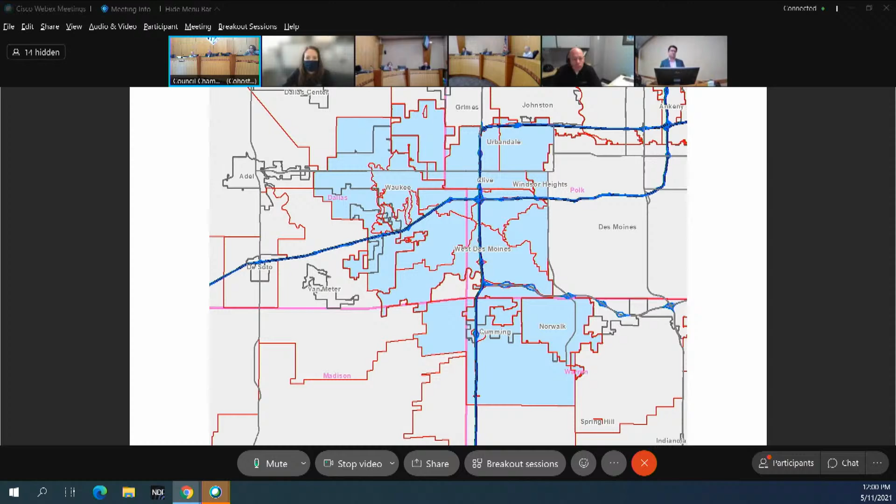And this would be, with Windsor Heights' addition, the coverage area. Growth in the future, is there options and opportunities? Sure, but Wescom isn't looking to grow just to grow. We want to make sure it makes sense for the system and the operations. And also, we've got now potentially 6 member communities that are all growing, or for the most part are growing themselves. So just keeping up with that population growth is an important thing for us.

So moving forward, some key projects: we're doing some rehosting of the network. Those are some things that we wanted to change from a technology perspective, as the chief alluded to. Another task of one of the other strategic planning committees, this was the governance committee that took on this project of updating the 28E. We have other subcommittees that are working on various elements of the strategic plan.

One of those is setting that service expectation. The Chief had talked about the accreditations to complement both your police department, Clive's police department, West Des Moines, that are all CALEA accredited as well, and other communities seeking similar paths. And then ultimately recommending the approval of Windsor Heights joining Wescom. So that is going for formal consideration before them on Monday. They are first in the queue of the formal vote.

And just to give you a little bit of the mechanics: all of the member communities are being asked to vote on and approve the updated 28E agreement. There's an additional action that both Windsor Heights and West Des Moines, as the operating agency of Wescom, will be doing, and that's a memorandum of understanding that lays out the terms by which Windsor Heights joins Wescom. A couple of the aspects to it: they're being asked to pay 2 years up front, non-refundable, for their operating costs. They've got costs they need to incur for their technology to get up to the Wescom standard, some reprogramming of radios, things like that they need to do.

So just a very brief agenda, and I know we're probably feeling a little squeezed for time, so I'll try to accelerate my portion. We're going to talk a little bit about the study scope, the technical approach, which is my element of the project, and then I'll transfer it over to Nicole to talk about the capital improvement planning process.

So where did this all begin? It was introduced pretty well before we got on stage here. The city issued a request for proposals back in July of 2020, right smack in the middle of probably the worst part of the pandemic. We got under contract August 11th, which means today is 9 months after our starting point.

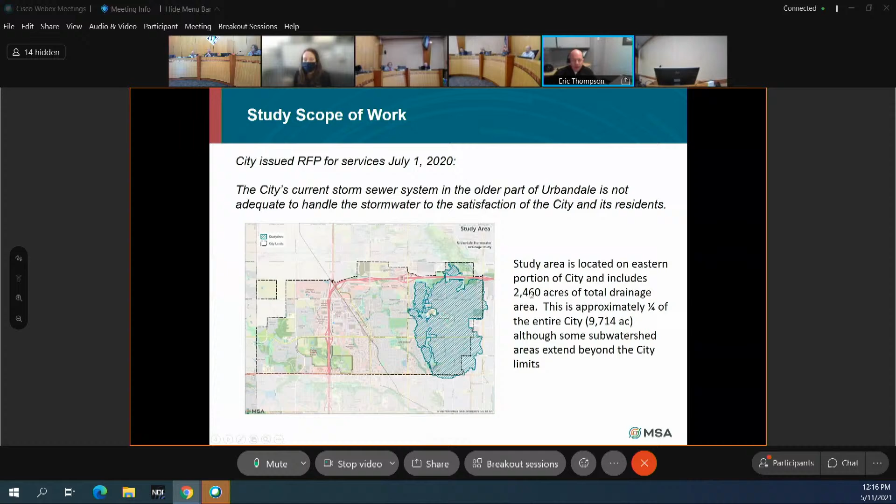You're going to see a blow up of this map in the next several slides, and I'll go over it a little to help you get your bearings. This study looked at 6 major watersheds, identified by the creeks they drain to. We more or less looked at what it would take to provide a design service level equivalent to the Iowa SUDAS manual, the Statewide Urban Design Specifications Manual. It establishes the minimum criteria for really all civil engineering projects throughout the state, and one of those chapters in particular is related to stormwater drainage and stormwater management. Pretty much everything we did followed the SUDAS design standards.

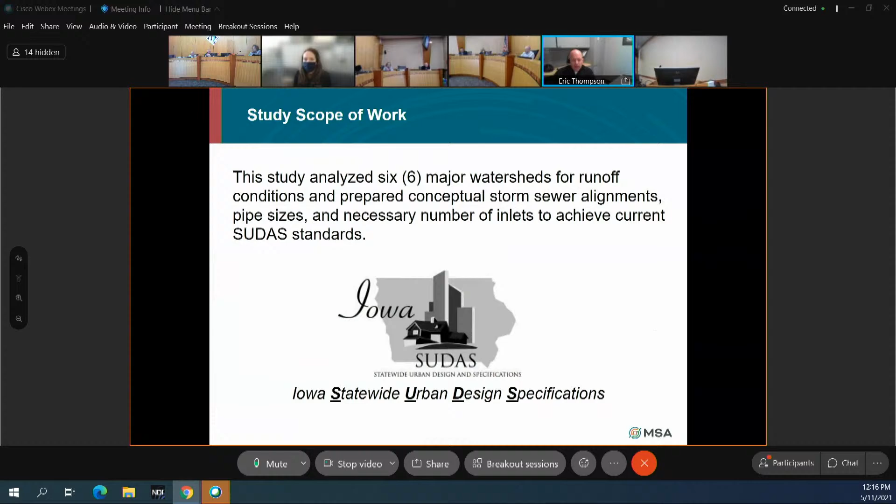So what are those standards? There's a whole host of them, but the long and short of it is we really focused on 2 things: the design service level. SUDAS says at a minimum we should be looking at the 5-year storm for a storm sewer design, but the engineer, if there are sensitive issues at hand, could up that to the 10-year storm. In discussing this with city staff, it was decided that the 10-year service level would be more desirable.

In today's way of thinking, we really don't like to talk about a 10-year storm or 5-year storm anymore, because there's an old school understanding that, oh, we had a 10-year storm last year, so we're good for 9 more years, right? Well, the 10-year storm is really best equated in terms of percent risk. We have a 10% chance any given year of having a 10-year storm, and if it was a 5-year storm, we'd have a 20% chance risk. So going from the 5-year to the 10-year service level provides an extra 2 times safety factor.

To put that in yet another way, the 5-year event is about 3.8 inches over the course of 24 hours, and the way we do these designs, most of that rain is compressed into the middle 2 hours of that 24-hour event. So 3.8 inches in 24 hours is the 5-year storm, and the 10-year storm is about 4.5 inches. These are fairly large storms considering how quickly they're falling across that duration. So criteria number 1 is, what is the drainage level of service? Again, we're looking at the 10-year service level here.

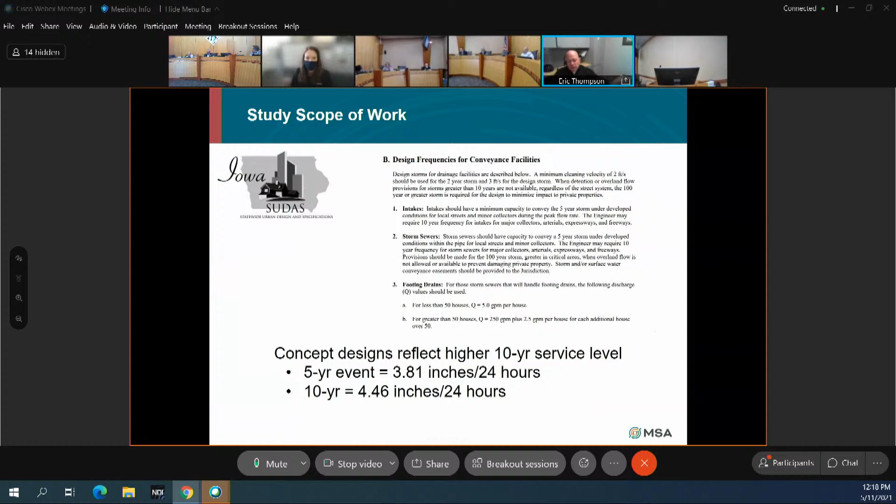Condition number 2 is to provide footing drain service to all of the existing homes in these neighborhoods, to make sure their foundation drains and sump pumps can connect to the drainage system. These are the criteria we're using, which are actually a little higher than what the SUDAS standard requires, which is generally 5 gallons per minute per house. We're up to about 12 gallons per minute per house on average in this part of the study.

But in reality, when you talk about footing drains and sump pumps, it's just a teeny tiny drop in the bucket relative to the flows that come off the land when we get one of these big rainstorms. So this is really a minor design detail, but nonetheless it was a significant consideration for how all the pipes were laid out, to make sure we had connection points for all the existing houses.

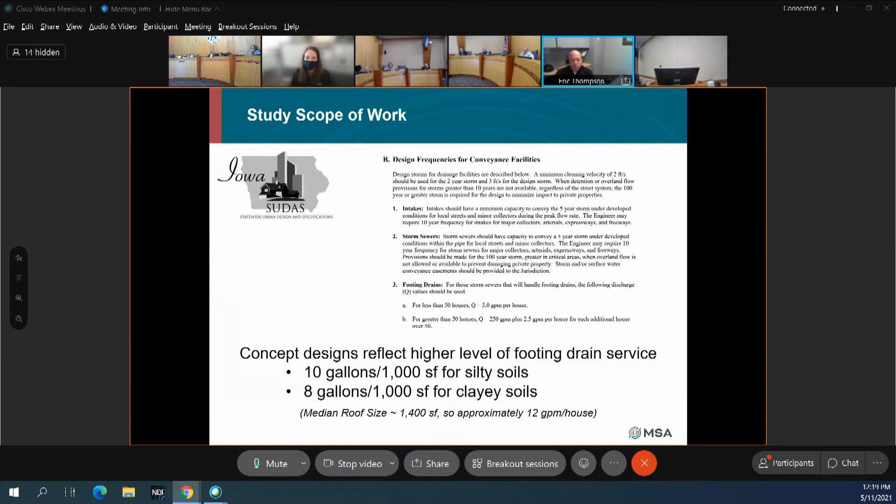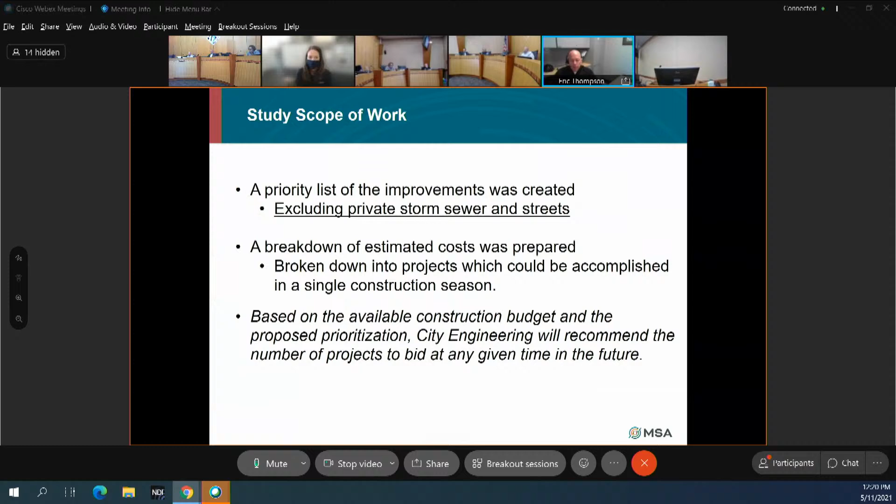The scope of work identified in the request for proposal was to provide a priority list of improvements on the public portion of the drainage system. That excludes private storm sewers and private streets. We wanted a breakdown of all those costs so they could be consolidated into an entire program budget, but also broken out into what could be done during a single construction season, or accommodated within an annual budget the city may have available. Based on the construction budget and project prioritization, city engineering will recommend what projects to do in 2022, 2023, and so on, as the capital program lays itself out into the future.

That's a brief recap of the study scope and what we're trying to get done here. I'm going to dive into the technical approach, and I've got two main points to convey to the council today. One is the vast amount of data we crunched to evaluate this entire system. Secondly, the final finding of how close the existing system is to what we'd like it to be in terms of an ideal system. That'll all wrap up at the end.

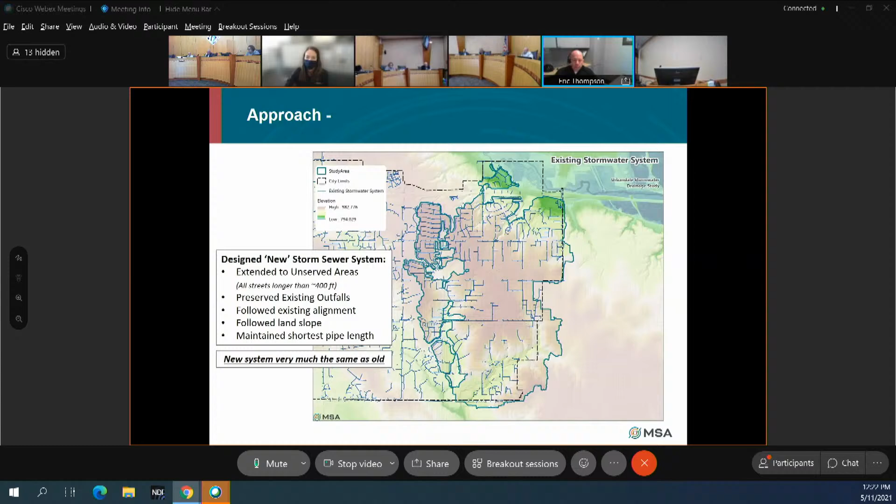Here are the study areas we looked at, organized more or less by the major creeks: Rockland Creek, Karen Acres Creek, Millside Creek, Timberview Creek, Northview Creek, and the Lakeview Pond area. I warned you I was going to give you your bearings, and I got a little ahead of myself.

If you can see my mouse jiggling back and forth, this is Interstate 35, and here is Merle Hay. On the south side we've got Hickman, and over here, a little tough to see, is 86th. Running about a third of the way up from the bottom, this is Douglas, and about a third of the way from the top, that's Meredith.

You're going to see this map in some shape or form many different times, and if you can mentally picture where these streets are, it should help you get your bearings when we start talking about anything specific. The total study area is about 2,400 acres - 2,460 to be precise - which represents just about a quarter of the entire city.

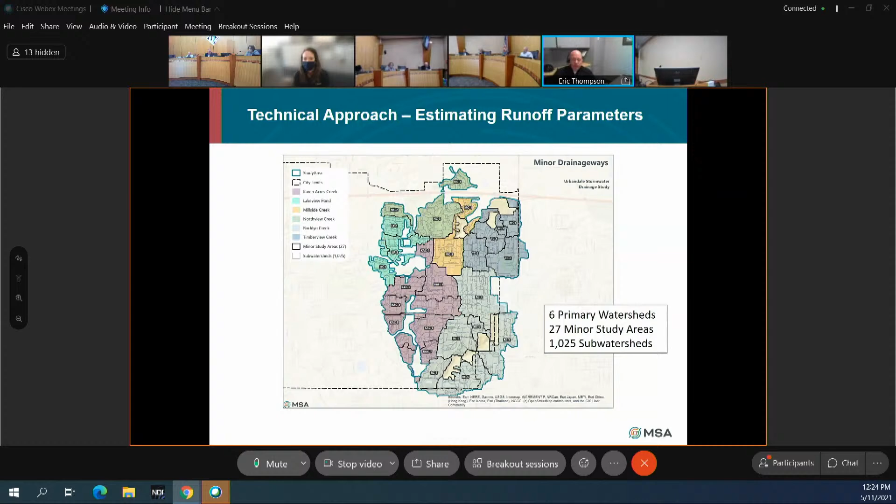So as we drilled down, we started with these large watersheds, and we broke them into 27 minor study areas, and then each one of those was broken out into subwatersheds, basically accommodating an intersection by intersection basis. When those intersections ended up being substantially more than 400 feet apart, we subdivided them again. This study ended up being over 1,000 individual assessments of how much runoff we're getting, how it's moving through the city, how we're collecting it, and conveying it through pipes. It became more and more detailed as we drilled down further into our design assessment.

How do we get to those flow numbers? Well, this is an important slide. This is an image of all the impervious area that's been constructed in this part of the city. We looked at recent aerial photographs, checked against construction plans, and actually measured and digitized all that impervious area, because impervious area is the primarily important driver in determining flow rates. There's over 1,000 acres of impervious area in this nearly 2,500 acre subwatershed study, about 42% pavement in some way, shape, or form, whether it's a driveway, a sidewalk, or a roof. It's a heavily, densely developed area, so there's a lot of runoff that comes from the lands in the study area.

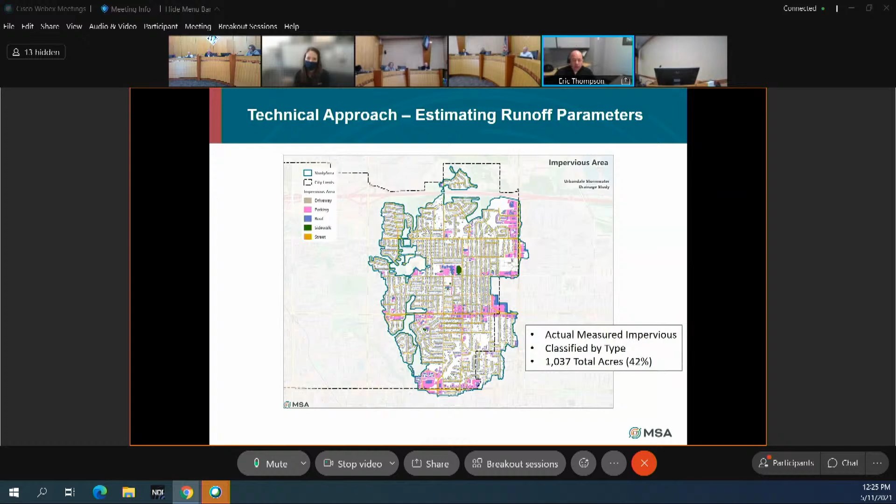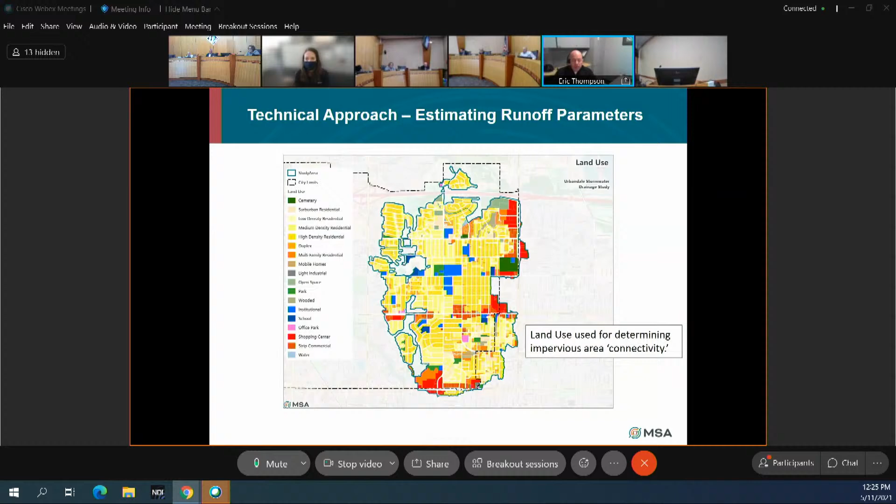This is the land use, which allows us to figure out what we call the connectivity of the impervious area. Does it drain over grass, or does it go to the street and then right into the storm sewer? Those are important considerations for how much water actually makes it to a pipe, as opposed to how much is coming off of the land.

And then finally, for areas that aren't impervious or paved, we need to know the constituency of the soil. Anyone who's worked in their garden probably understands it's a pretty heavy soil area, pretty silty. In some areas in the north and west where you can see those purple blobs, it actually gets kind of clayey. So even when the area is not paved, the soils do tend to shed more water than you might expect in an area that has sandy soils, for instance.

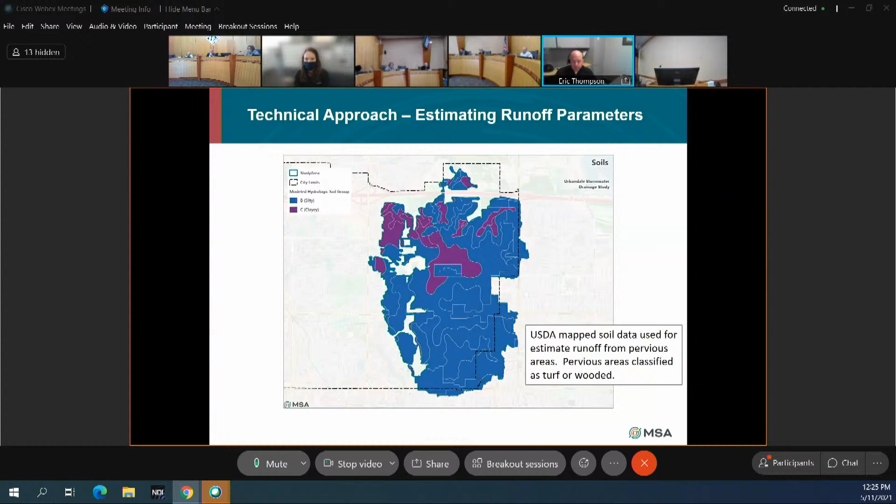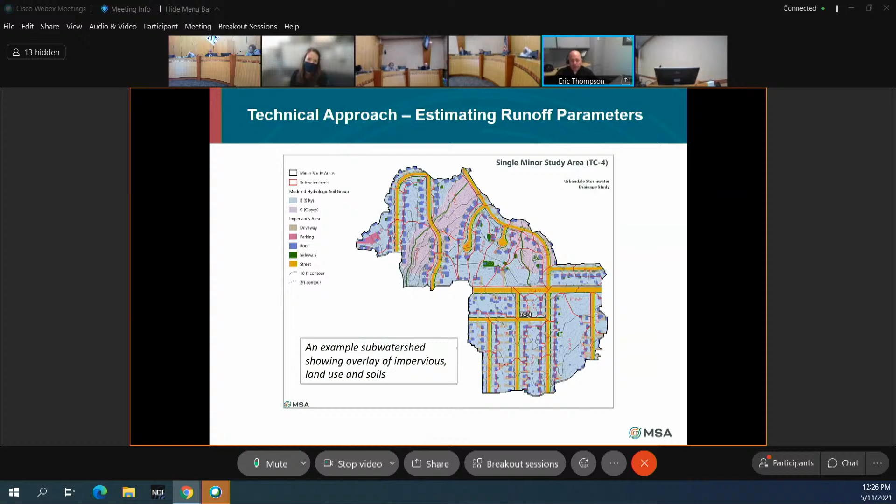Here's how it all broke down in terms of building these watershed models. I always try to describe this like a giant cookie cutter. You lay out one layer of dough, which is your impervious area. You lay out another layer of dough, which is your land use, and a third layer of dough, which is your soil types. And you take this giant cookie cutter, in this case a watershed boundary, and punch it out, and that gives you all your runoff information, which you can reduce into the various coefficients that go into the models.

So here's just one example of the model. This is for Karen Acres Creek Subwatershed 3. There's nothing really to take away from this except the fact that, wow, there's a lot of dots on the screen. Each subwatershed, each one of these 1,025 subwatersheds, had three different elements: one which described the runoff from the impervious areas, one that described the runoff from the pervious areas, and then one that summed it all up.

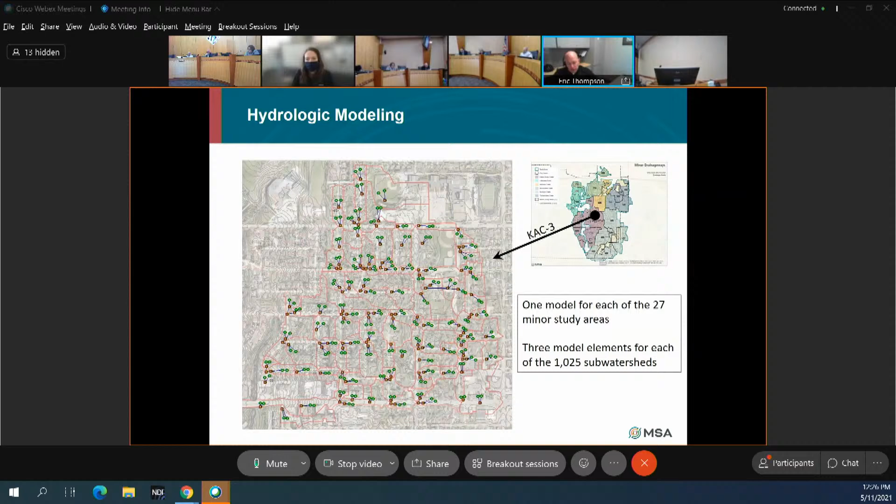And then we brought all that together into a proposed pipe network so we could see the flows from the upper part of the watershed, adding to the flows from the middle part, adding to the flows from the lower part. Of course, as the flows increased, the need for the pipe sizes increased. Hundreds and hundreds and hundreds of calculations.

This is a relatively unsatisfying slide, I'm sure, from your perspective. It's just rows and columns of numbers, but there are lots and lots and lots of rows and columns of numbers on our end of things. We looked at the 10-year peak flow capacity, and you see I've got a little asterisk in there. We did have some exceptions where we were looking at larger design events. In particular, there were some areas in the city where large detention ponds were made, and those were intended to provide a 100-year service level. So we wanted to make sure the system downstream was able to convey the 100-year storm and not cause that pond to have backups and stop functioning the way it was.

And there were a few areas where elements of the creek were actually encased in pipe. Given that the creek itself is a major conveyance system versus the pipes, which are generally considered the minor conveyance system, in that instance we wanted to elevate the pipe service level to the 100-year storm so that we made sure we weren't causing backups, which would otherwise cause flooding or overland flow that was less than desirable.

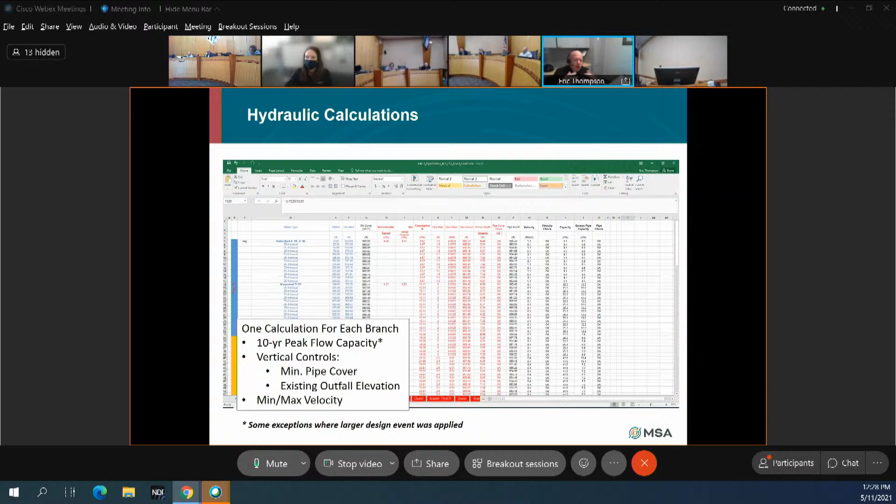So on one hand, we've got the desire to push this pipe further down into the ground to protect our pavement, but on the other hand, we don't want it to be so deep that it gets expensive to build. And then at the end, we've got to connect down at where the creek is, and we can't go any lower than that, else our pipe will be full of water all the time whenever the creek is flowing.

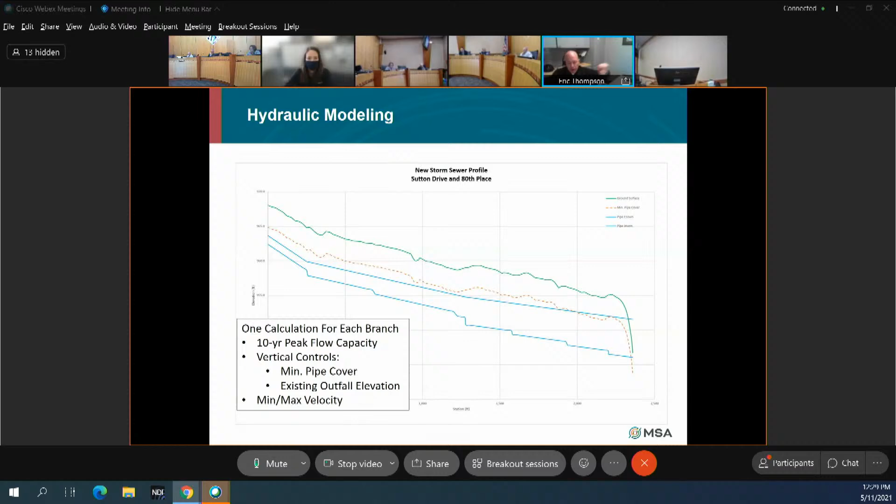So we're trying to use all of these calculations to figure out what is the minimum pipe size we can have to get the capacity we want with the minimum bury while we still make a connection to the creek where we can discharge all of this stuff. It sounds kind of simple, but it's a lot of back and forth, looking from the upstream down as we accumulate flows, looking from downstream up as we change our pipe profile and pipe size until we find that optimal design.

So here is my last slide before I transition it over to Nicole. There's a lot of numbers here, and to someone who doesn't work with storm sewer systems on a daily basis, it's probably fairly confusing.

But what I will tell you is the existing storm sewer system serving this neighborhood is just shy of 37 total miles long. Now, that does not include the foundation drain connections - this is just the dyed-in-the-wool storm sewer pipes. Of that, about 25 miles is 18 inches and smaller in diameter. And the reason I drew that distinction is because an 18-inch pipe is what you might consider to be a fairly large inlet lead.

So as the watershed gets larger and the drainage network extends, the fingers at the very ends are where all the inlets are that collect all of the water. Those inlets come together into the branches, and then those branches come together into the main trunk systems. An 18-inch pipe is kind of the threshold where you start thinking, well, this is no longer an inlet system, it's becoming a branch. So the 21-inch to 36-inch diameter pipes - that's sort of the main branches, and that makes up the bulk of the storm sewer system serving this part of the city.

And it's not altogether surprising considering you've got all of these open channels, and flow paths don't have to be particularly long before you can discharge. So we've got pipes getting up to 36 inches in diameter, making up the bulk of the system. And for those areas where we've got a slightly larger watershed, slightly higher flows, 36-inch diameter pipe, we've got about 2.6 miles. So the bulk of it falls very clearly in the 21 to 36-inch diameter, and then the next step is the trunks.

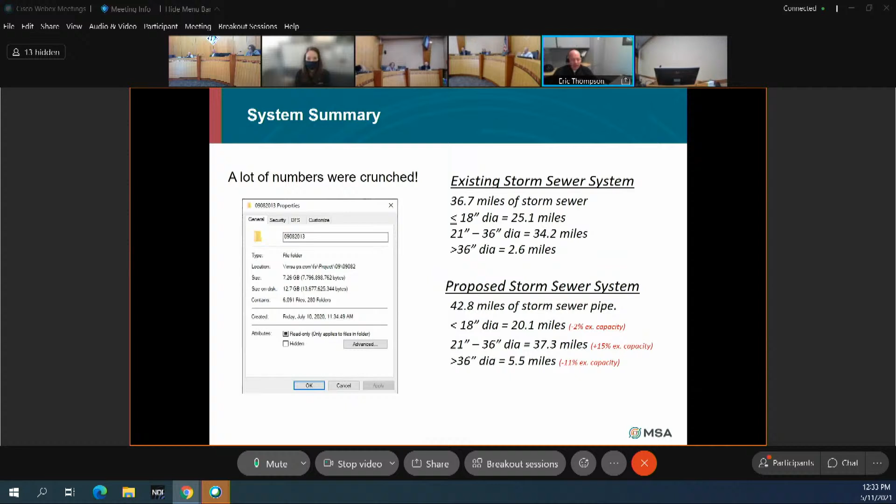All right, so that brings me to the transition point, and I'll hand it over to Nicole where we can talk a little bit more about the capital improvement planning. Nicole, if you want me to advance the slide, just let me know and I'll push the button. Okay, you can. Yep, that's good.

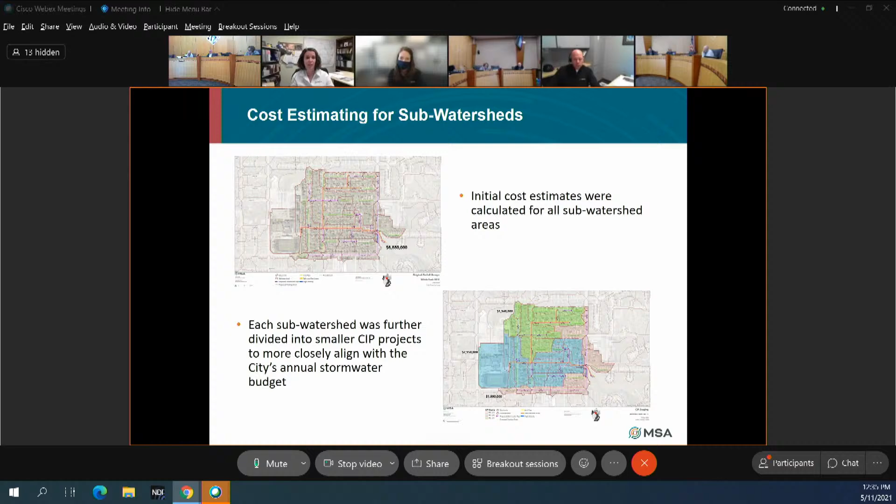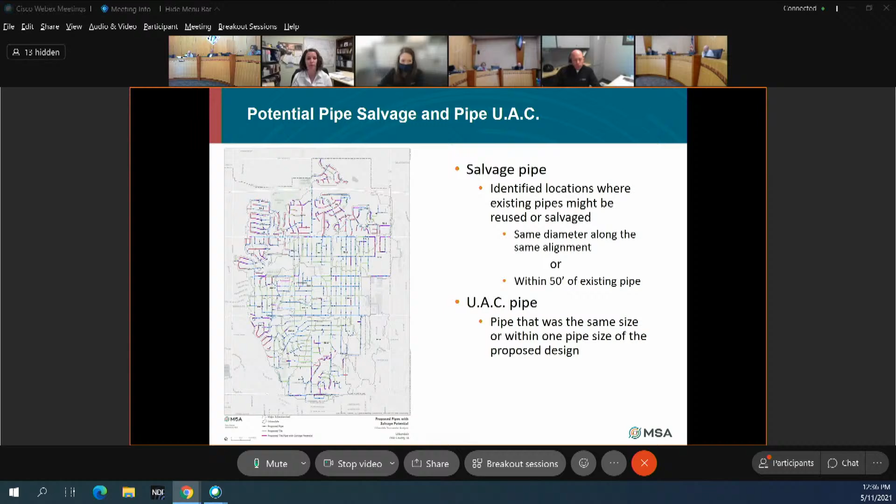We also looked at pipes that could be use as constructed or UAC pipe. Those are pipes that were either the same size or within one pipe size of the proposed design, because we don't want to be pulling out pipe that is that close to the proposed design, since it can be used hydraulically within that size range. It also saves the city money. So that's the criteria we're working with here.

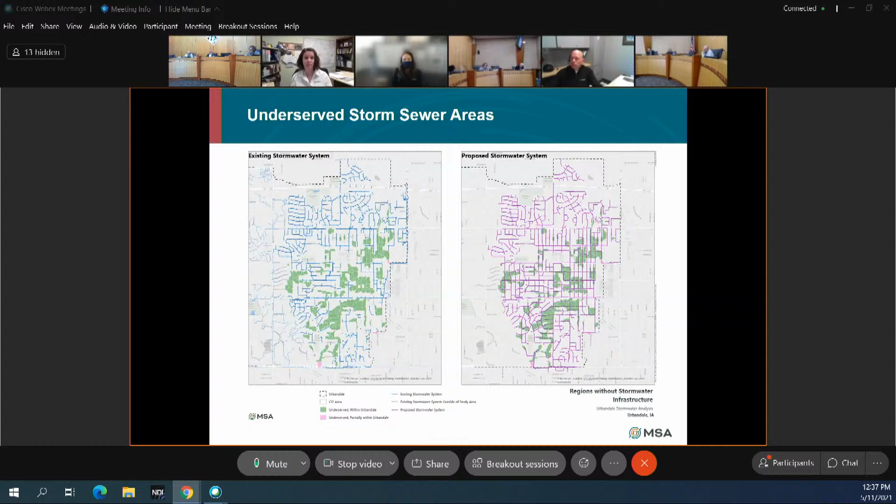Eric, do you want to hit the next slide? Okay.

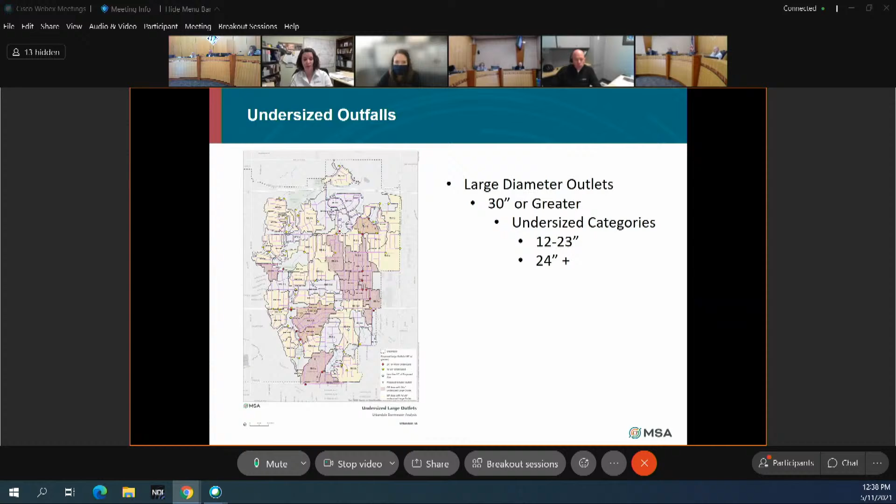Eric, to the next slide.

You want to go to the next slide?

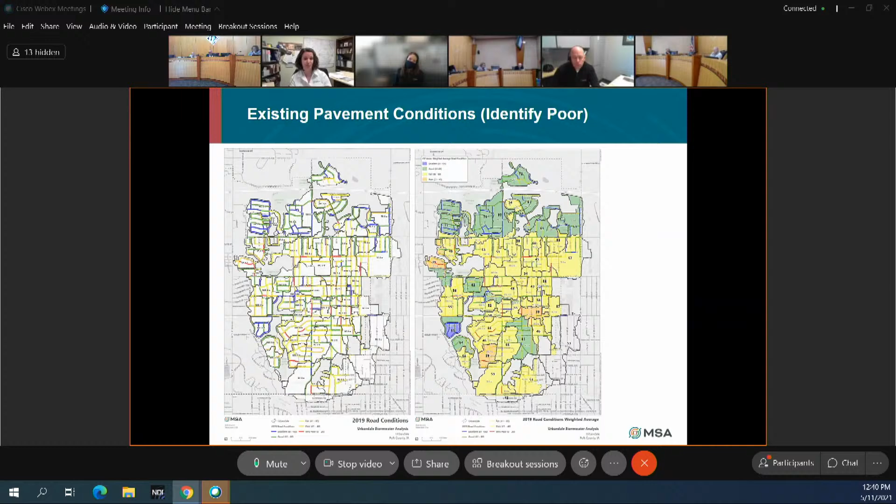Eric already kind of hit on this one about the trunk lines. Those are the pipes that are 36-inch or greater and connect all your networks. So you've got your small pipes, the fingers at the very top end of your system, that go down to your outlets. This system had pipes that went all the way down to, I believe, 84 inches. So anything 36 inch or greater, we gave a higher ranking for connectivity than the small 18 inches of pipe or the footing drains, shown in that light green. Those are the ones you want to reconstruct first, because they're the ones that get all that flow down to your outlets and out of your system.

Eric, the next slide.

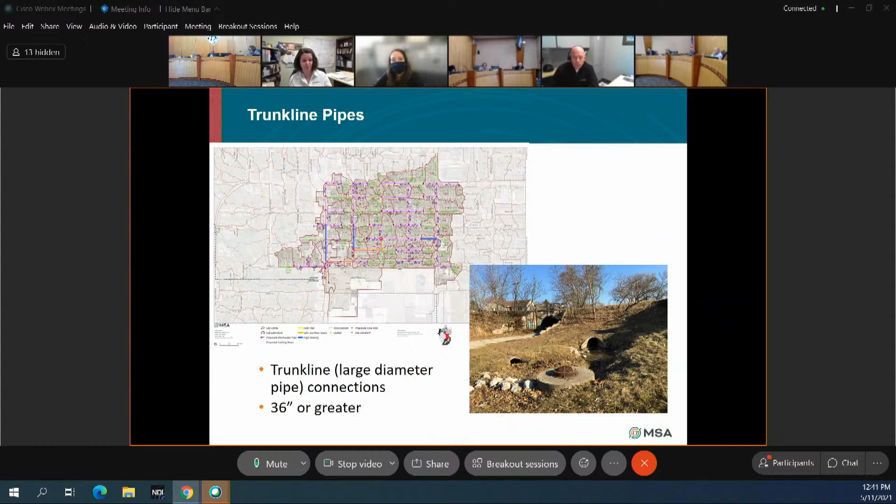As an engineer, as you can see from Eric's slides way back, we do a lot of spreadsheets, but that's not as conducive for people to look at all of our information. So Amber, who is also on the line here, put together this nice graphic to represent this information.

As we looked at those, they ended up being either bike trail projects or beautification projects, so we didn't give them any value or weight because they don't really impact your stormwater projects. In the future, when the city reevaluates, there will be an opportunity to add weight to those if desired.

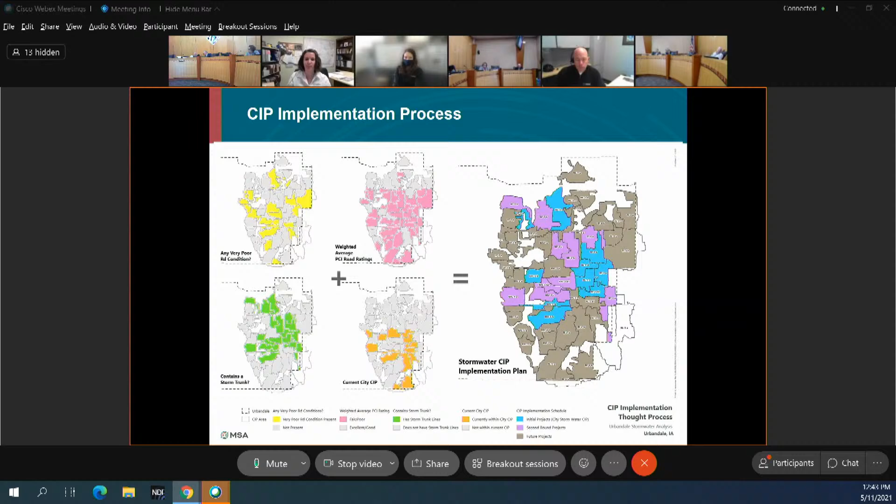And Eric, can you go to the next slide?

Now you can see on the right-hand side the final graphic. What you see in gray is what's been ranked as far-reaching projects, ones that probably won't get done for many years. The ones in pink and blue are in our 2 priority groupings. Those are in areas where there is no existing storm sewer today, and that's probably why they're up in the rankings, or for other reasons like poor pavement or trunk lines.

They were based on the rankings we previously discussed, with input from city staff. From that blue area, 6 projects will be pulled to be placed on your current CIP, and the remainder will be reviewed annually by city staff to be added to the CIP as necessary.

The city will have access to our GIS files where all this information is located, including pipe sizes and which pipes can be salvaged, and so on. They can create projects by putting it together and modifying it in the future based on any conditions. So if something changes 5 years from now, they can pull a different project together. We've made our final product user-friendly so they can create a new project if something changes in the future.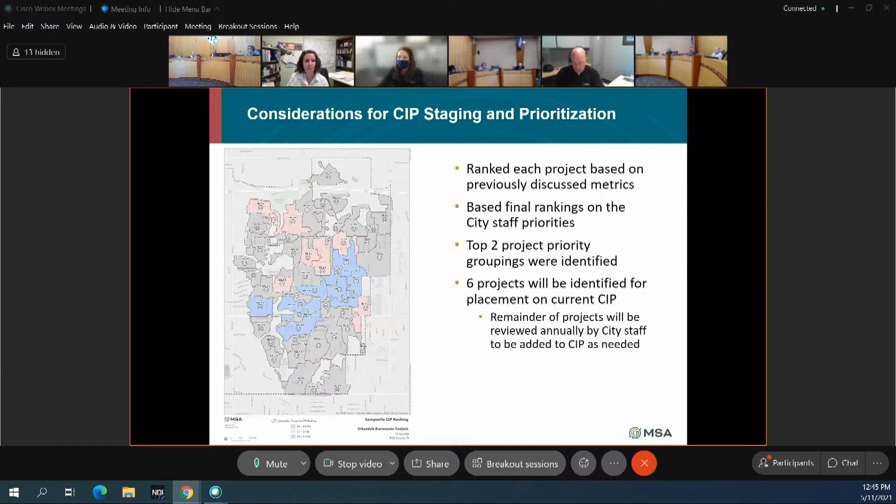And from that, I believe that's all we have. Any questions?

How many hundreds of millions of dollars are we going to spend on this?

The good news, as they've said, is we're not grossly undersized. So there are a lot of pipes you could enlarge, but it's really not a big priority. Where we do have some areas that are underserved or do not have any storm sewer, we'll work through those. And then there are some other areas where larger pipes would be beneficial. So it's a very high overall dollar figure, but I don't know that a lot of these will rise to a priority that you'll actually get to.

If you've got an 18-inch pipe that should be a 24-inch, is it worth the cost to replace it for that small change? It's probably not. It's more like what we did on 73rd Place, where you might be getting into the 54, 60-inch pipes, where you actually see a true benefit.

Going forward, we'll have to work with the sewer district and decide how we handle the sump lines, where the biggest benefit is getting people to disconnect from the sanitary sewers and into the storm sewer. Right now there's no mandate from the WRA, but I'd say sometime in the future that'll come. When they reach plant capacity, they'll start pushing other communities to get that rainwater out of the system, so we'll be challenged by the need to have a collection system for them to connect to first.

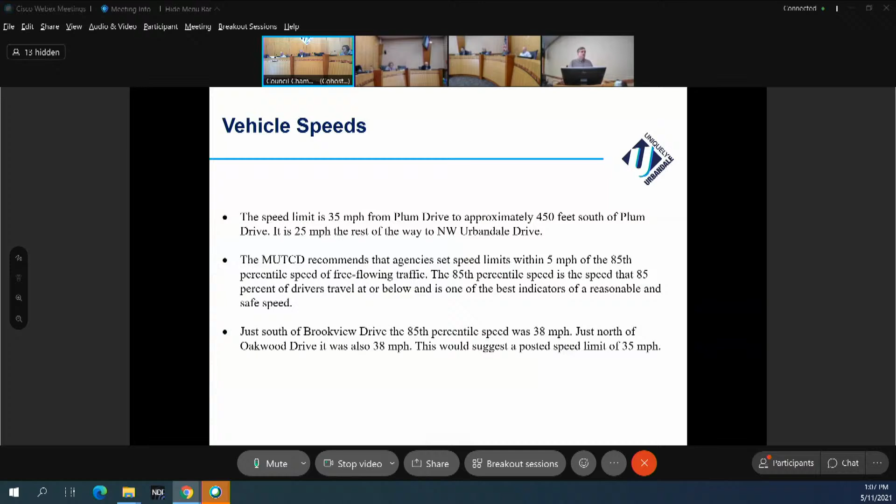Looking at our traffic volumes, since we did two different counts, that's why you see one is 6,400 vehicles a day and the other is 6,800 vehicles a day. I think it's safe to say we have around 6,500 vehicles on the stretch between Meredith and Plum Drive.

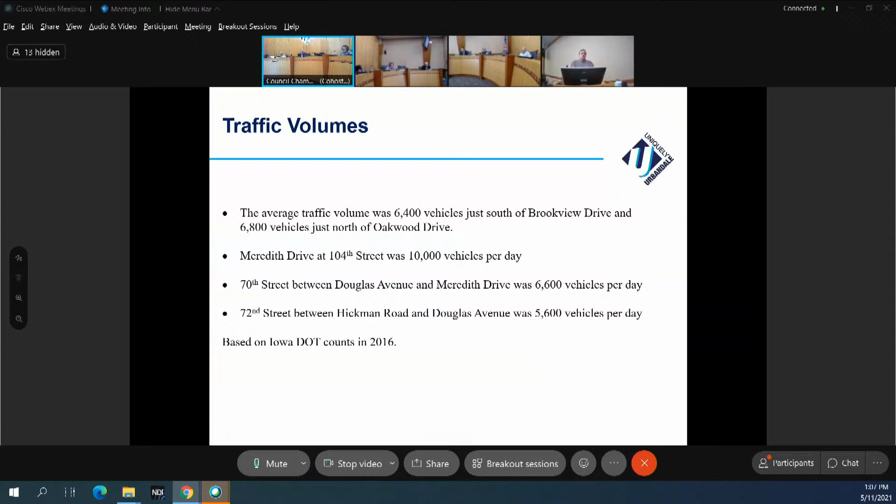We want to give you a little bit of perspective. If we look at Meredith Drive just east of 104th, by the soccer softball complex, it's about 10,000 vehicles per day. I should also note these are from the DOT counts in 2016.

So then I wanted to look at what streets would be similar to the 6,500 we have on 100th Street. 70th Street between Douglas and Meredith Drive has about 6,600 vehicles a day, and that's a four-lane roadway with several driveways coming out onto it. Then 72nd Street between Hickman Road and Douglas Avenue has about 5,600, where as we get north of 73rd into 72nd, it's predominantly a two-lane road with a few driveways coming out onto it.

And John, note that's 2016, so those are 5-year-old numbers, aren't they? That's the most recent we have from the DOT, the 2020 counts aren't out yet. Yeah, but again, those numbers were 2016 numbers. Correct, but it's hard to say if they've gone up or gone down, just with what we've got going on in the pandemic, or even with fuel prices that fluctuate throughout the year.

So again, that was just something I wanted to use as a general comparison, to give you a feel for other roads that have about the same number of cars on them.

But wouldn't they be higher because of the interchange that we built? Oh, the numbers I gave for our stuff, the 6,500, that was just counted in the last month. Oh, okay, those are from the study. The three that were basically comparison ones are the 2016 ones. So yep, that was from Snyder's study with the two locations, they just physically counted those in April. Okay.

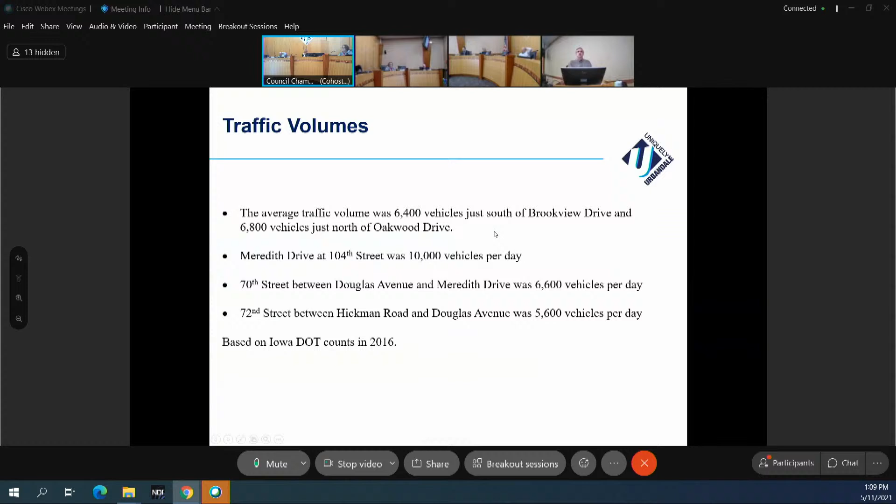From the Snyder study, they looked at the trucks and broke it into two categories. One they called a single unit, which is a mix of delivery, service, or rental trucks—like UPS trucks or U-Haul trucks. Then the combo units, which would be more like semi trucks with trailers, your box type trucks and bigger semi-style vehicles.

Since these were counted at two different times, they found at one location roughly 8%, or about 500 of them, were delivery type trucks, with 1%, or about 65, being combination semi trucks. All figures are rounded to the nearest percent. At the other location, it was more about 310 single units and about 85 combo units.

In the CIP, we do have for 2022 the reconstruction of our 100th Street project as a 3-lane roadway, which was what was recommended in the HR Green study. Basically that's looking at the route to the interstate as a main route that helps you get to the interstate—it provides a direct route.

As I mentioned before, some of these other example streets do have driveways out onto them. The access control has really been good here, so we don't have a lot of driveways—just a couple down by Northwest Urbandale Drive, one to a business and one into the soccer softball complex. Otherwise it's just a few street accesses, which I think gives more of a residential feel when you have those driveways coming out.

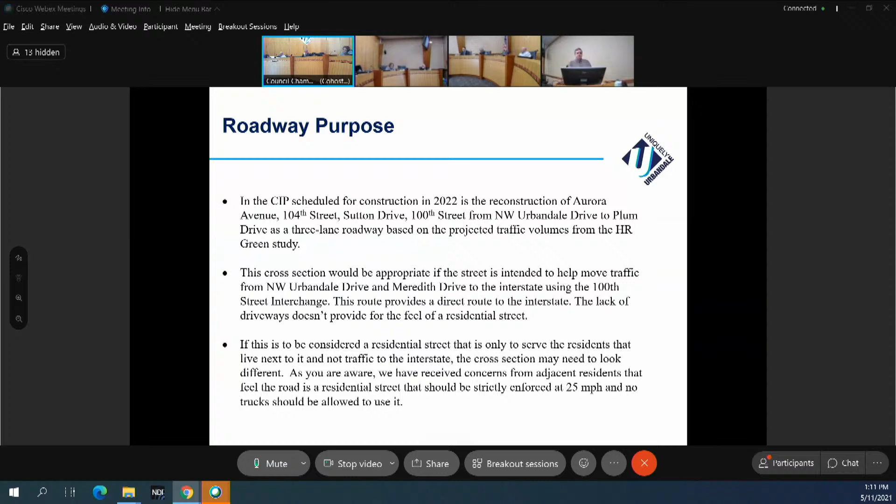So here are some examples from the study on what could be done, and these are a little different than what we normally see in Urbandale. If you wanted to control speeds and make it more difficult for trucks to come through, you could add median islands in the middle of the street that would force people to go around them and slow down. Or you could do chicanes, which have bump outs on the curbs and make you wind through the street, which slows you down as well.

I know we've talked in the past about trying to prohibit trucks—we could pass a resolution that would do that. Currently I found we have 5 of those in town right now. 4 of them are just south of Meredith, just west of Merle Hay, a little ways past. The other one is east here on Colby Woods Drive, between Colby Woods and 83rd down to Hickman, which we've also designated as a no truck route.

I think the difficult part is really enforcement. Every time somebody sees a truck and calls the police, how quickly can they get there, and is the vehicle even still there? And then do you start limiting—are we talking only semis, or also delivery trucks? In which case, is it the UPS truck delivering somewhere in the neighborhood, but now they're leaving and somebody calls the police saying there's a truck in the neighborhood? So I'm just throwing out that I think enforcing that can be difficult.

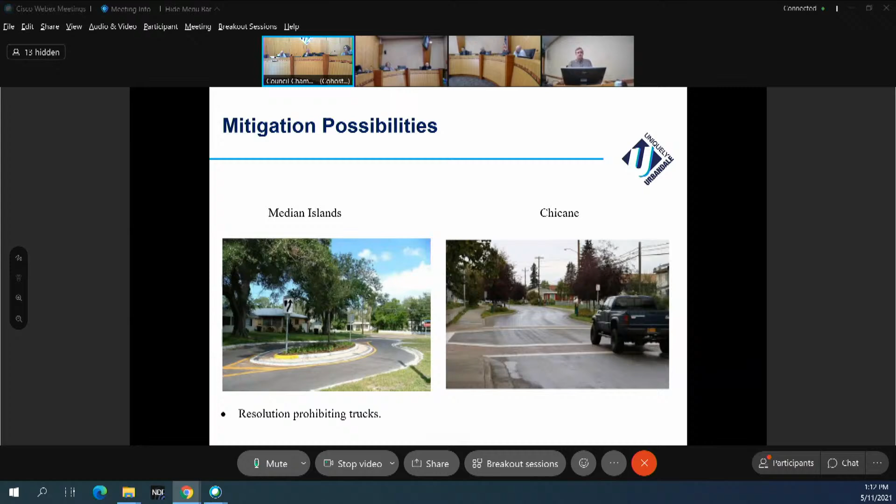Another thing they recommended is that it's possible we could install roundabouts in the corridor, potentially at every intersection—all 3 through here—which would help control speed and slow people down. You could design those to really make it difficult for trucks to go through as well. This could be a tough sell in the neighborhood, or possibly you look at this one, which is the main entrance to the area, as a roundabout. You could design that to deter trucks too, but there are different options out there.

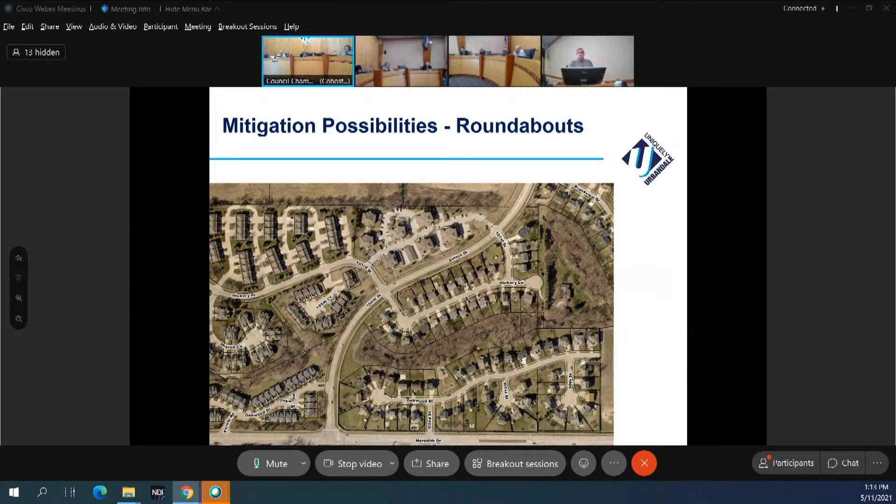I guess with that—this is kind of the point where, as AJ said in the email—I'd like you to think about how you look at the area and get some feedback. Do you see it as, hey, this is access to get you to the interstate, we just built the new 100th Street interchange? Or is it something like, no, we look at this as a neighborhood and don't want to encourage people through there? Or is it something kind of in between?

I guess for me, it's Plum Drive South that I consider the divider point. I would like to see some physical barrier there. I don't think 25-mile-an-hour signs or no truck signs will work, people will be on the road before they see that. So whether it's chicanes or, I don't know, even just making it 2 lanes that opens up to 3 lanes further down.

I figure that's what the engineers are for. I think that's where the message to the traffic has to be, right south of Plum Drive, to say this is not your come-off-the-interstate, go-this-way-for-services route. We want people to go east and west at that point for services if they're coming off the interstate.

So this was before my time, before Adam's time. What was the intention of the 100th Street interchange? Was it to get people to businesses on Plum Drive and north, in that commercial area? It's to provide additional access to the commercial area, but I also think it's to provide additional access to the interstate.

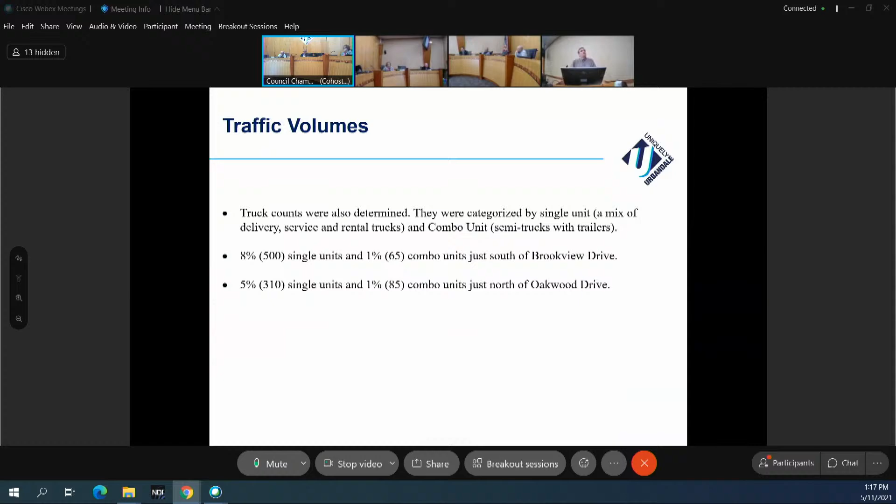Yeah, so they're coming through every day. And traffic counts of 6,500 cars a day, that's as busy as our main thoroughfares throughout Urbandale. Like it or not, I believe it's become an expressway and everyone's using it to get on that interchange. I don't know how you could get around it.

When you plan that type of interchange with all that development, and Plum Drive's not even developed yet, what are you going to do when that's completely full? That traffic's just going to increase. And to try to reduce it, restrict it, or slow it down, I don't think that's realistic. I think your 6,500 a day today will just exponentially grow as that place develops.

Adam's our developing guy, but once Plum Drive and even North Park Drive fill in, I don't know how many cars that's going to be, but with all that land developed, if you think it's busy now, what do you think it's going to look like in 5 to 10 years? Well, I think it's more of a...

What year did we reconfigure 100th to cut it off at Meredith and then do the Sutton Drive to 104th? I believe that was around the mid-90s. And that was long before the 100th Street interchange was finalized, obviously.

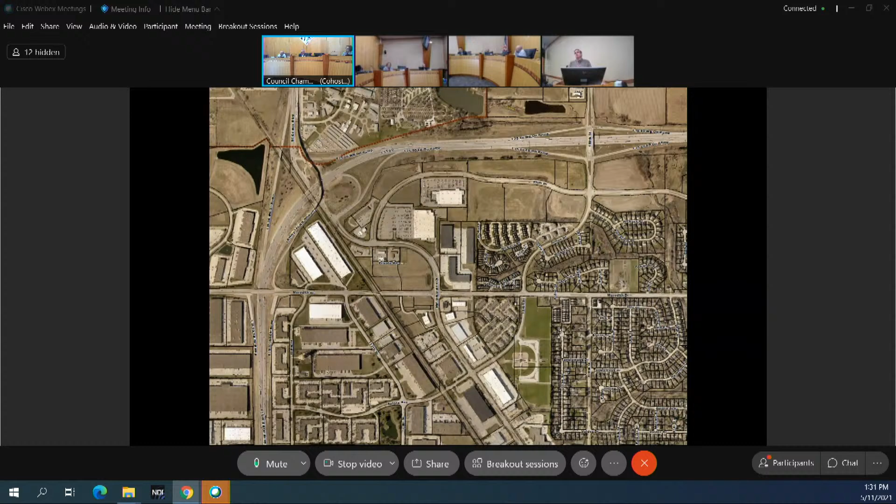Maybe can I just quick run through the complete streets and let you know what I'm thinking there, and then maybe we can wrap up here, just because that may impact things. So again, here's kind of the same corridor we were looking at.

The pink is where we've got an 8 or 10-foot trail now, so you can see we have that around the sports complex up Northwest Urbandale Drive. And then these smaller lines are just where the backyard trails or sidewalks get you over to the bigger trails. And we've got this main trail that comes up through here to Plum.

So we've got a plan in the future where this blue line is, to have a trail that'll connect over here to 100th Street, which takes you north over the interstate.

And with our maintenance project, where we recently received some STP money, we want to get a trail in on the north side of Meredith here from 86th Street over to 104th as our first phase.

So in our complete streets, keep in mind that kind of looks at everything from a high level on what would really be nice, and then comes down to, when it comes time to build, we've got to look at what you can physically construct there. Right now, our complete streets has the separated bike lanes, the full 15 feet with the 10-foot asphalt and the 5-foot concrete sidewalk. I'm just not sure we can fit that into this corridor.

Couple things to look at or point out, I'll go up here at Meredith. Currently, we've got a pretty good retaining wall along the soccer field, and I'm not really sure why the design is such that the left turn lanes seem to be offset the opposite direction. Normally, at a minimum, you'd at least want to line them up here, so you could move the left turn lane over here, which would eliminate this lane and give you some room for a trail there.

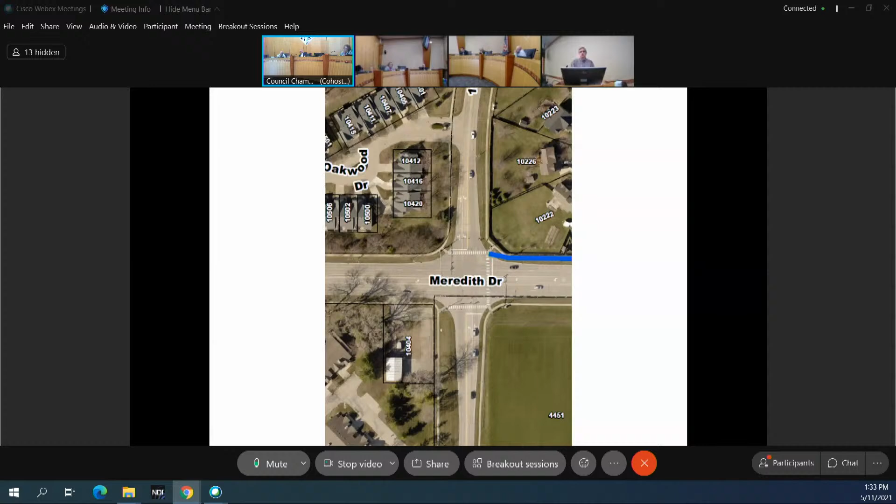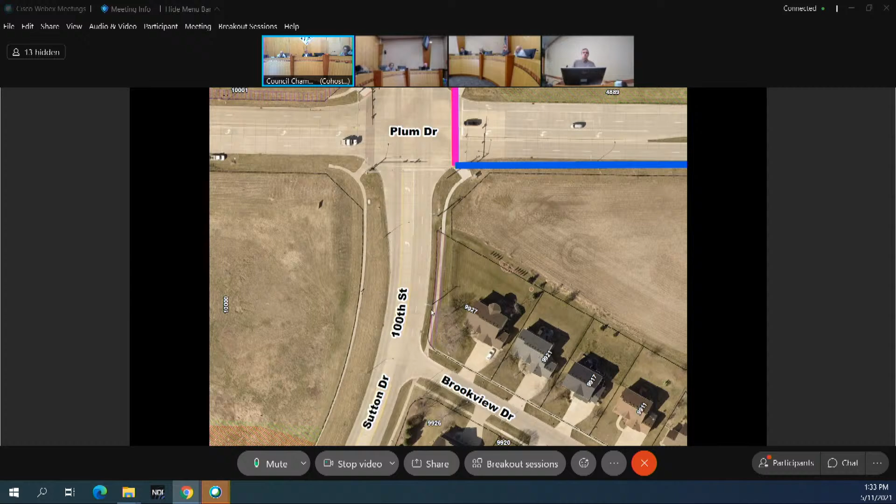As we get to the north, I don't think we have room. If we wanted to move the lane here, we're right up against the sidewalks, so I don't think we can shift that part of the intersection over. The problem over here is, in order to get a trail in, we're likely going to need an easement from Crystal Creek. We'll need quite a bit of grading because it drops off behind the sidewalk, and several of those trees would have to go away, which makes that difficult. Then up at our north end, we've got a current easement just south of Plum where we've got room, though we might need a small retaining wall at the edge of the easement, but we could get a trail in.

So ultimately, to work on the connectivity, it seems to me the trail really wants to be on the east side so that we're connected to the sports complex and on the same side of the street as we get up to 100th Street and going over the bridge. I just think what makes the most sense would be a 10-foot trail on that east side to at least make that connection through there. I want to include what I was thinking on the complete street side and what we're thinking on our overall street corridor.

So a 10-foot trail on 104th? Correct, go from Northwest Urbandale Drive all the way up to Plum on the east side. That would tie into the other things. Again, I just don't think we have the space to fit 15 feet in there. I think that'd be fine with a 10-foot trail along there. Okay.

So I think we'll go back, regroup with our engineers, and see what the thoughts are on still providing the traffic to the interstate, and maybe what we can do to deter the larger trucks a little bit through there. We'll come back with some options for you for another review, and we'll keep within our time frame too. We apologize, we covered a lot of stuff today.

AJ and I have talked a lot about communicating with neighbors, and you get what you ask for. But I do think it's important that we be transparent and have communication as we move through this, because we know people have a lot of opinions, regardless of whether we support their opinions or not. I think they need to know we're having this discussion so they can be party to our discussions and not just be presented with it when we've made our decision.